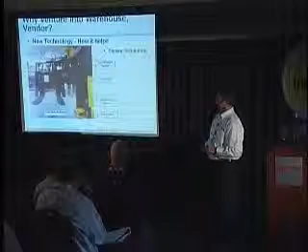These are some of the things that we found. You remember I talked about we put the system in and what did we learn? We found all these headaches that we weren't expecting to see.

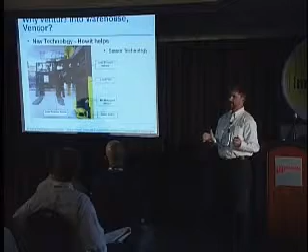Pallets that overhang. They're not supposed to have any overhang on our pallets. Oh, guess what? You got overhang. We have pallets that were skewed. They're not supposed to be skewed.

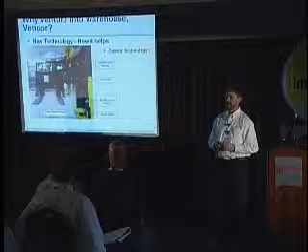The things that we couldn't take into account, we now take into account with sensors that we just didn't have in the past. We had these sensors, bin occupied sensors, and of course load flaps and load present sensors. But we were actually using devices that weren't as capable as what we use now.

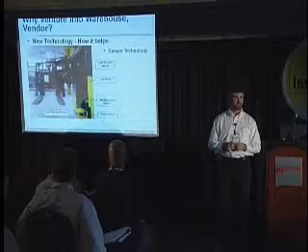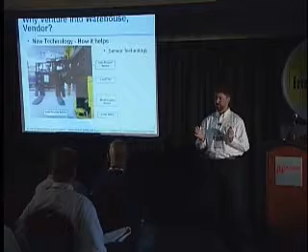We actually use laser sensors now to determine distances to pallets, offsets of pallets. You'll see that there's a sensor here and a sensor here. So we can actually tell as we go into the rack if that thing is pushed back a little bit, if it's a little too far out, and then we can adjust accordingly as we go to pick up.

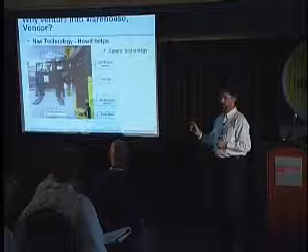The last thing in the world you want, or I want, is when I go to a position to pick a pallet up and I don't get a load flap, that I just sit there and stop. Doesn't make an awful lot of sense.

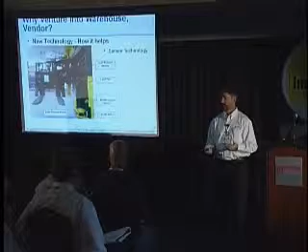So we use these sensors to be able to determine where to go, how far to go, make sure that we're going to pick these pallets up, because these systems are designed to run lights out. Wouldn't be much good if you had to have somebody there running the machines. So they're designed to run completely lights out.

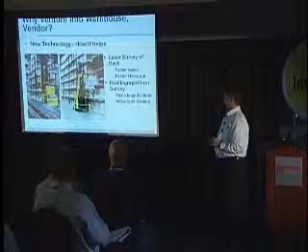What else did we learn? Talked about the racking wasn't straight, and then there were, people hit rack. We all know that. So from time to time, you have damage.

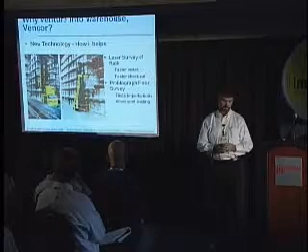But what we found with the new systems that we're putting in is, wouldn't it be smart if we actually surveyed these rack locations with a physical survey up front? So rather than going in and measuring each and every location, which is what we did before, we actually get a survey crew out, and we survey those locations a lot quicker.

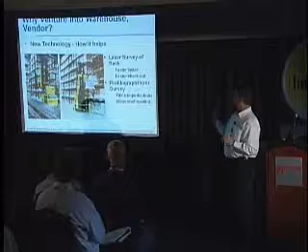We can do it almost automatic. You can almost do it automatically. We survey it, then we can check the locations out in a manner that, again, we didn't have available before.

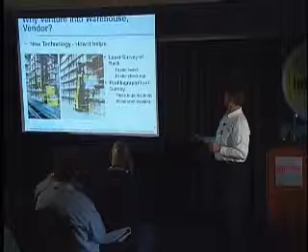A little piece of history for you. The systems that you're going to see, this system here says AGV products on it. That's where I came from. So we are now HK Systems.

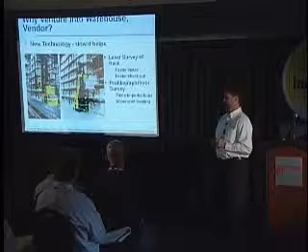One of the benefits that we have now is because, for lack of a better term, this is an ASRS. HK Systems has more ASRS out there than anybody that I know. It's probably an overstatement, but anyway, there are tons of them out there, and one of the things that we learned from them is that there are ways to check these locations automatically.

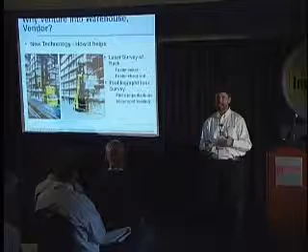We had no idea. I mean, there must have been something. We probably could have wrote a routine to do it, to check each one without actually physically walking out.

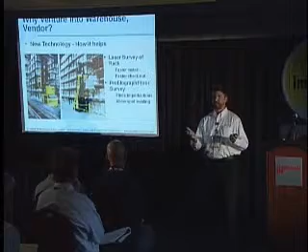HK has got a program. Can you believe this? They've got a program that goes out and checks the locations, determines if they're off, and then feeds a feedback loop to tell us how far they're off. Can you believe that? We used to have to do that all by hand.

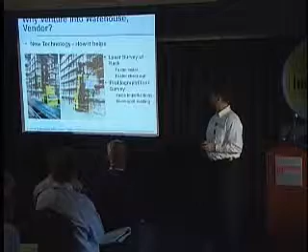Okay, so what does that mean? Faster install, faster return on investment. Okay, we're all getting there. I'm belaboring it a little bit.

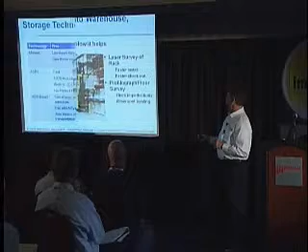The other thing, the floors, we can now profile the floors. Now, one more note. This is not my slide, but somehow one of my friends decided that we should put this in. But it is a good idea, but it probably should be near the end.

If you're thinking about this from a technology comparison, we're talking about technology, of course. This is the way that typically people look at this, and you want somebody to frame it? This is a way to frame it. Let's just frame it right up front and say, which one would I use?

You're probably doing manual stuff now. Most people are. Nothing wrong with that. Low asset investment, you can throw more people at it, certainly.

The cons: labor, product damage, inventory accuracy. Inventory accuracy, you use software to fix that, right? So that's not really a big deal. Product damage, you're going to see it. You can't help it. I mean, you have people, you got human error.

It happens. Quality labor, you're going to see a slide in a second to highlight what that means, and you guys are all probably experiencing this. ASRS, they're very fast, 100% accurate, works to 20 degrees below zero, so freezer applications—any freezer applications in here?

You're the man. Back there too, perfect.

ASRS is good for that, no product damage. Usually can't change aisles - that's true, there are some that do change aisles, but they're quite slow. High cost, absolutely, they are higher in cost, high value. Fast, high cost, high value.

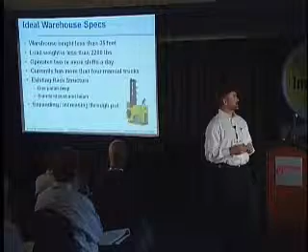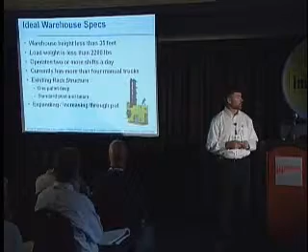Again, ideal warehouse specs - the vehicle's designed for 35 feet. Load weight less than 2,200 pounds. It's kind of a misnomer - that vehicle, as you see it on the bottom, is called an HK75. Its load capacity is 7,500 pounds,

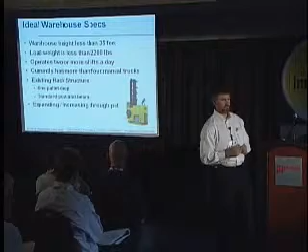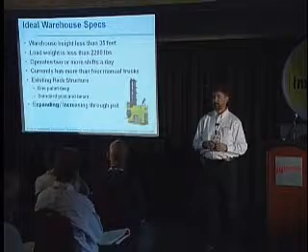but not at 35 feet. At 35 feet, it's only 2,200 pounds. So that's what we advertise. There's a de-rate curve somewhere in the 20-something feet range - it's 3,500 pounds. So hopefully that's pretty close to what everybody's using.

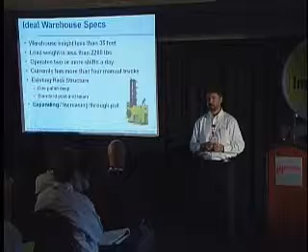Operate 2 or more shifts a day. Why is that important? Return on investment. Let's hit the low-hanging fruit. If you're operating 1 shift a day, you better be hauling butt and have a lot of forklift drivers, or else you're going to have a hard time justifying it. And at the end, that's what it comes down to - return on investment for being able to do something like this. You got to prove it.

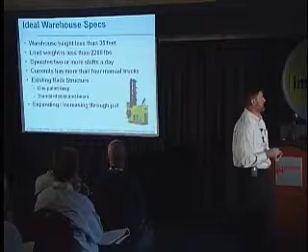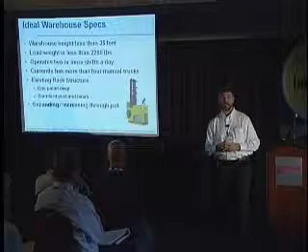Currently has more than 4 manual trucks - absolutely, that makes sense. Existing rack structure, of course we're going into a manual warehouse. If you have existing rack structure, it's certainly less of an investment to come in and put these vehicles in. And increasing and expanding throughput.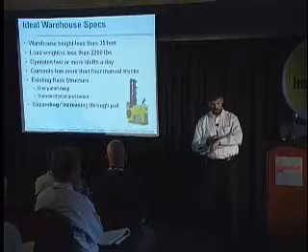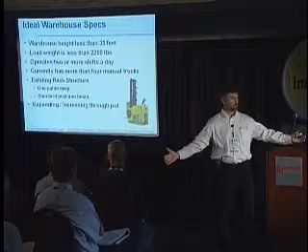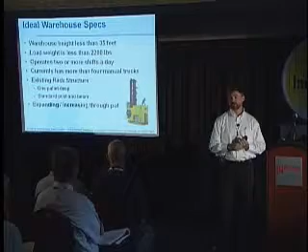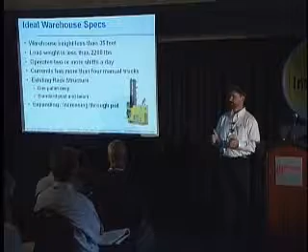You're going to see, again, in the user profile, a profile of a company that decided to do this because they were increasing their throughput. And they were going from narrow aisles, 10-foot rack aisles, to a very narrow aisle. And it was the perfect way for them to gain space. What are they not making anymore? Real estate, right? Certainly if you got a building and you can't expand it, why not make your rack aisle smaller? That's what this company did. And they found a way to increase throughput and increase density of storage by going to a different type of system, what you see here.

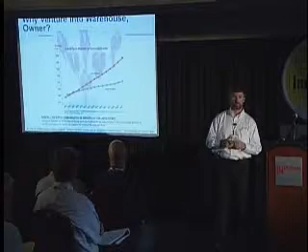Here we go. From the owner's perspective, you guys, I'm going to tell you a story. What I really like about presenting is not really presenting, but telling a story with what we're trying to do here. The story that I'm going to tell you occurred about 5 years ago.

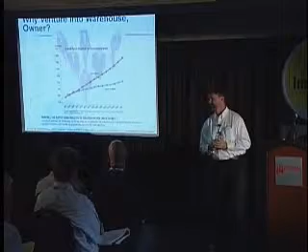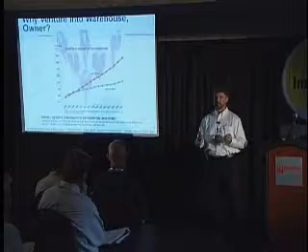I'm not going to tell you the company name, but they make fryers. So I went to visit him, and he was like, you know, we get fork truck operators in, and that was just about the time when there was the big OSHA push to make sure you had forklift training. Everybody knows you got to bring forklift trainers in. It costs about $1,000 to train your whole crew, and then away they go.

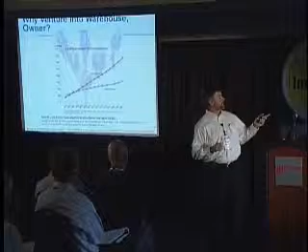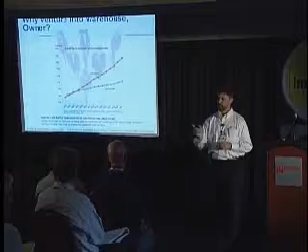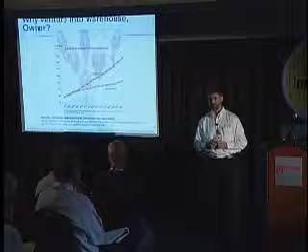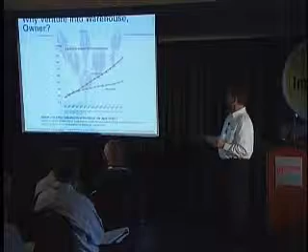Well, they were having a hard time getting labor. They were also having a hard time keeping it, especially fork truck drivers. You know why? Because you would pay your fork truck trainer to come in and train your fork truck drivers, and then the guy down the street would offer your fork truck driver $0.25 more an hour. And guess where that guy's going to go? That's what happens. So not only do you need labor to do this, the workforce is retiring, the pool is getting shallower and shallower. We need to look at not just getting low-hanging fruit, but getting a way to get away from repetitive tasks and labor force issues, and this is one way to do it.